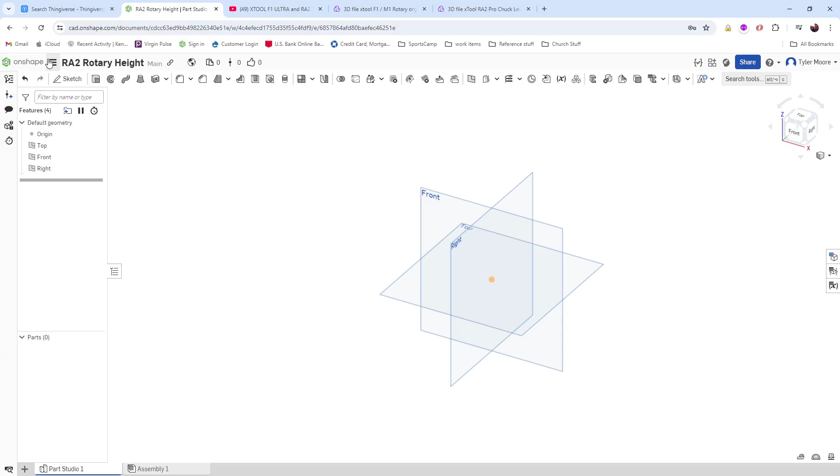I'm working in inches as well. That's another thing. So up here, I went ahead and chose inches because it'll default to millimeters, but I'm using calipers and stuff, so all my stuff's in inches. So I just go ahead and keep it in inches for now, anyway. That won't affect the exporting or anything. It just will affect how you put numbers in.

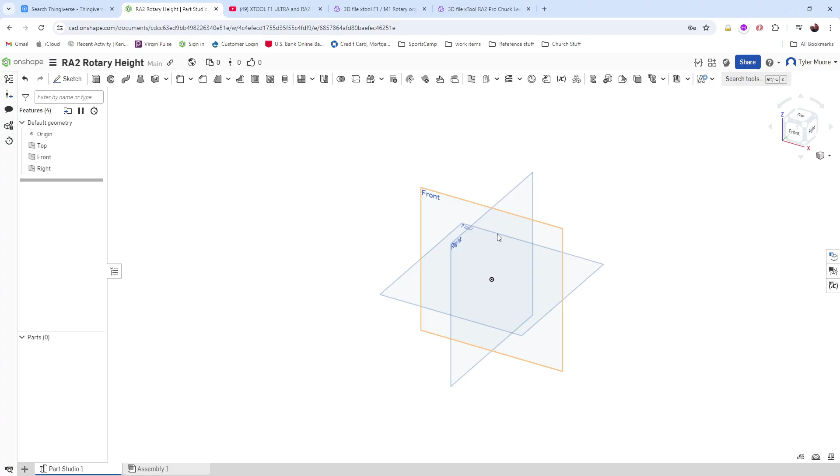So anyway, I'll start off with this. I'm going to create a sketch, and the first thing it wants me to do is choose a plane. Because I work on isometric so much, the way this part will sit in my brain anyway, I'm going to choose the right plane to work from. Obviously, this basically matters to the orientation of how it's going to export, but you can also fix that in your slicer software.

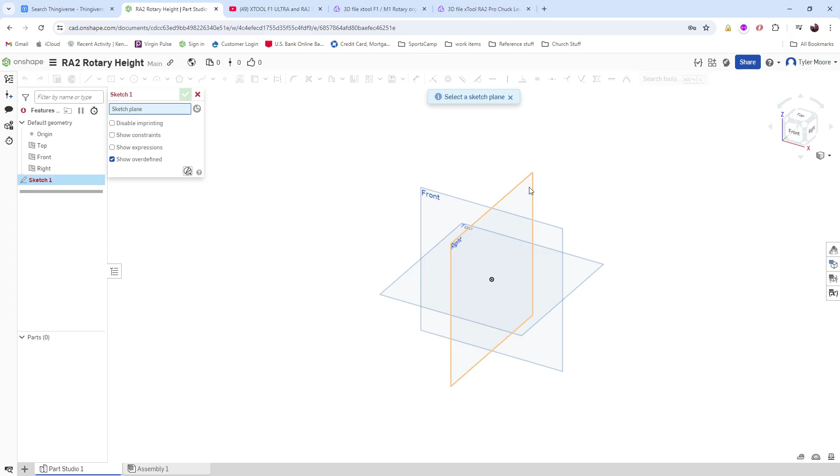So yeah, this is just because this is how my brain orients and how I was more or less trained. So I'm going to choose the right plane, and normally it'll go normal to that, but I'm just going to hit the N button, and that'll go normal to the right plane. And so I'm just going to start drawing what I more or less need, and go from there and explain to you what it is and why.

So basically, this can be the general outside shape, and I'm not going to worry about dimensions yet. I will, but not this very moment. And I know what I want is basically another cutout that's kind of off center of the top, and so I can take that and I'm going to start adding some dimensions.

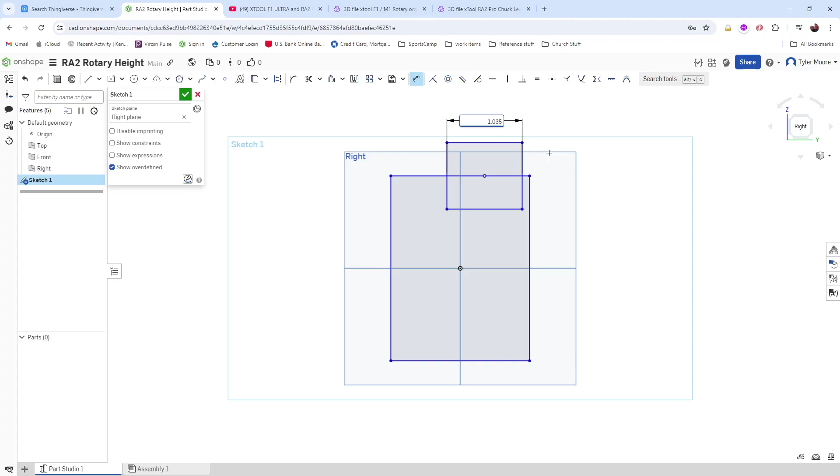And so this first box here, this is the most critical dimension for me. So I'm going to go ahead and put that one in at 1 inch 35 thousandths. And then the second critical dimension is this guy here, for my application anyway. All right, so I've got my two critical dimensions in there. And now I'm going to start filling in some of these other ones that are just design decisions. Let's go ahead and grab this top guy here. So 1.37.

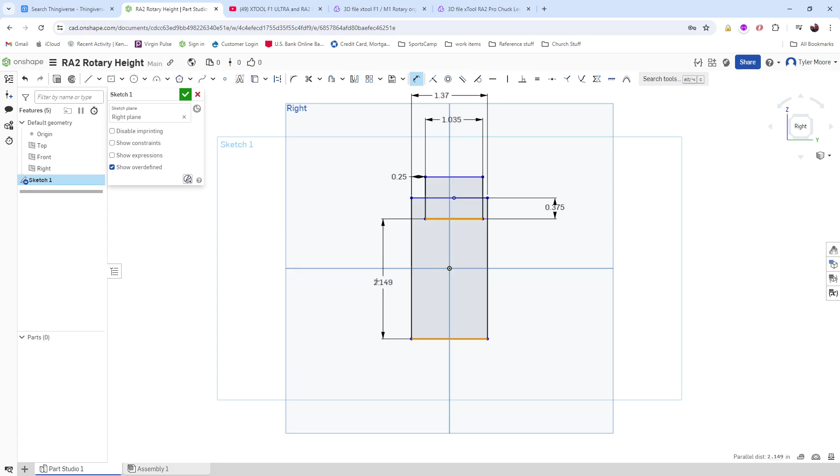And I know it's going to be a long video for you to watch, but you can flip through it however you want, and get the different parts.

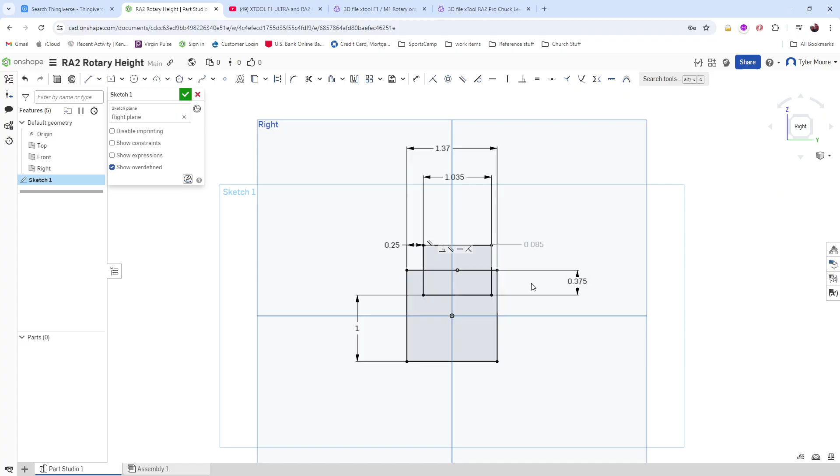But anyway, so this dimension here, whenever I click it, you're going to see all these being bold and black, and this one not. This one's grayed. So these are what they call driven dimensions. So basically, I can drive what those are, or sorry, not driven. They actually have a different term for it. Maybe it is driven. Onshape has a different verbiage for it, but anyway.

Basically, I can tell this dimension that I want it to be 1/4 of an inch, versus this one over here that's going to be the resultant of other dimensions. So I can put this one at a different dimension, and you'll see this one change, but I can't force this one to change this one, if that makes sense. So you can kind of see, well, it went really, really small.

But yeah, so the point being is that I can't double click this one and make that one change a dimension. I can only change this one over here. So just a little tidbit that you've got different types of dimensions. This tool up here, this dimension tool, is going to auto decide which one it needs.

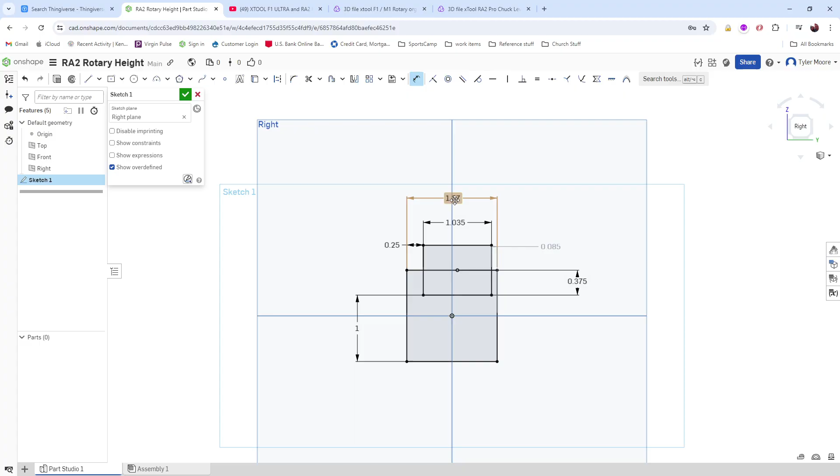Sometimes it can be smart, or it can be too intelligent or not intelligent enough. You just kind of got to know your tools a little bit and make it work for you, so to speak. But yeah, so it'll auto select those. So anyway, moving on. So this is the general shape that I want, and you may not get it yet.

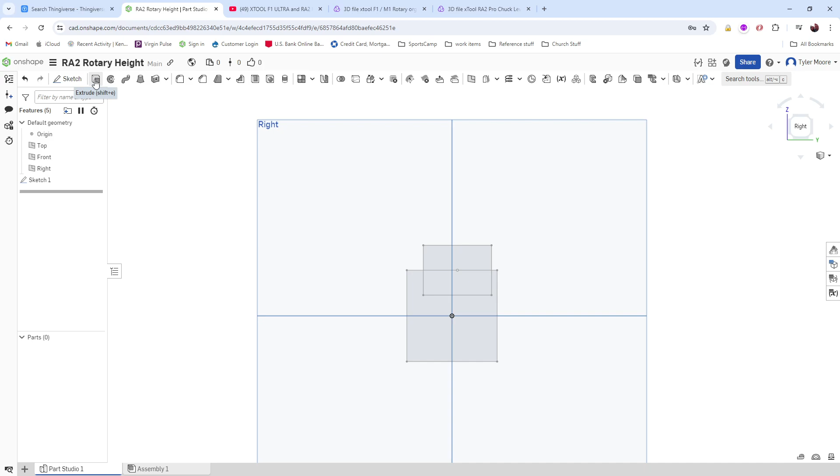But basically, what I'm going to do is I'm going to select up here, and I did that quickly. Sorry. I'm going to select extrude. If I'm inside the sketch, it looks like this. I'm going to select extrude, and then I'm going to select the faces that I want. It auto selected the whole sketch. I don't want that. I want just this face to extrude out, just this one. So I'm going to select this one, and then I'm going to hit right here.

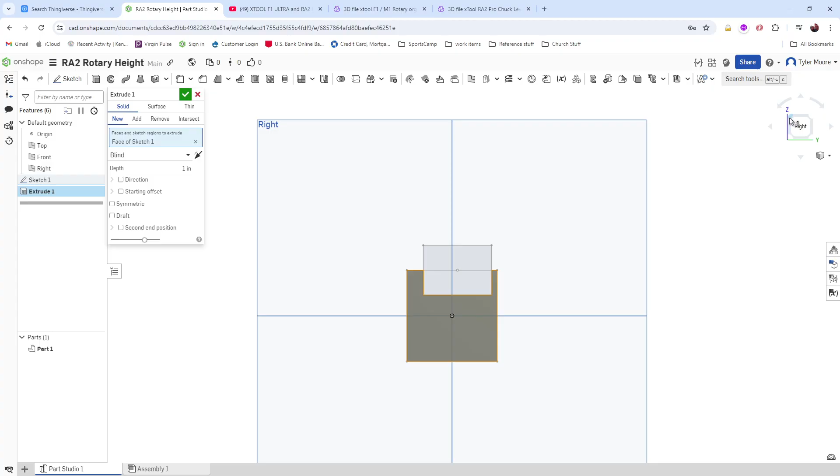You see how that one corner highlighted right there? So I'm going to select there, so that puts me back in isometric view. And so now I can see that extrusion. And so I know that I want that to be a total of, I'll just make it a total of 5.425. So it's going to be that.

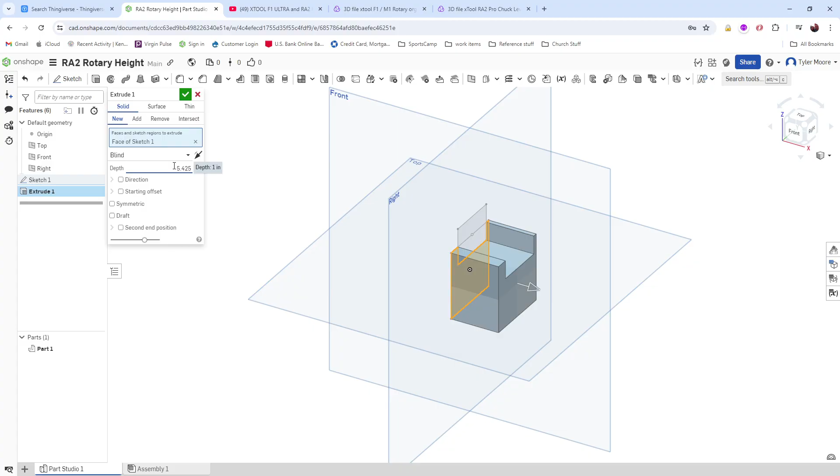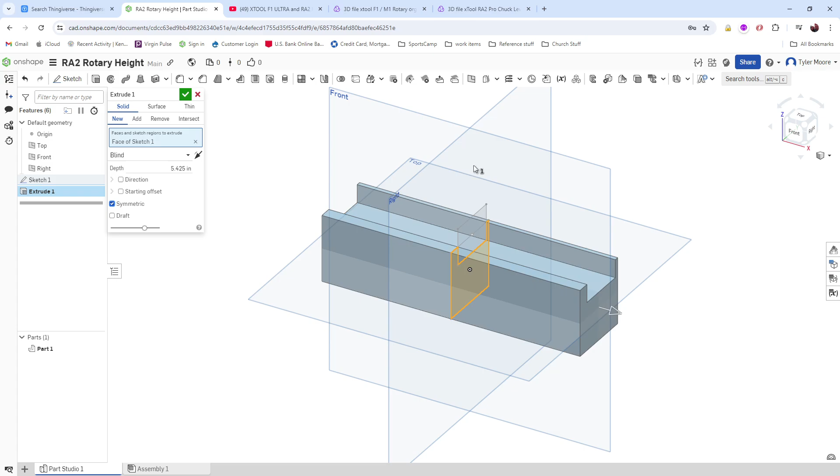Now, I prefer things to stay symmetrical inside of the world coordinate system. There's reasons for this. Maybe not right now do I have a reason, but it can be helpful to keep that symmetrical. So if you hit that symmetrical button, then it's going to basically split it on both sides of the right plane to make that dimension equal on both sides. So I'm going to go ahead and hide all these planes because now I more or less don't need them anymore. And so yeah, so we'll do that.

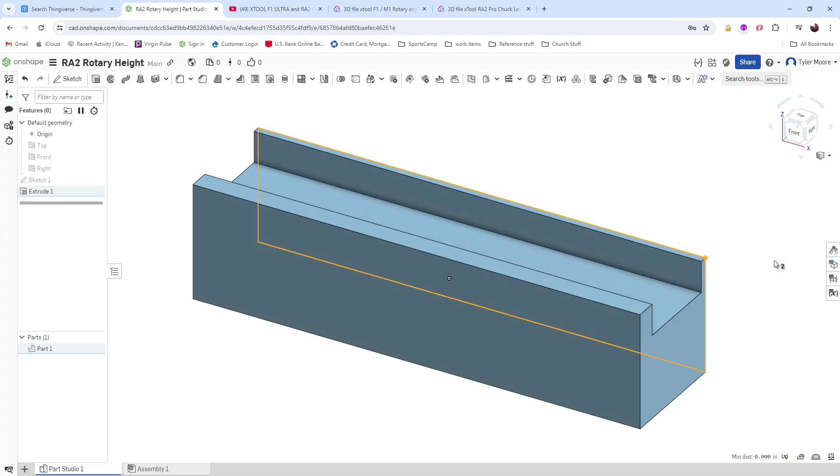So now I want to throw my holes in and make my hole pattern. So I'm gonna come in here, and so for me, the way that I dimensioned all of these holes that I'm going to be needing to put in, it's going to be coming from this corner back here. So I'm just going to go ahead and flip over and basically orient to this face, and I'm going to do that by hitting the N button. That's going to bring that face to the front.

And so from here, I'll just select new sketch. And the first thing I'm going to do is I'm just going to grab that circle tool, and I don't care where they fall at this very moment, because I'm gonna make them go where I want. And so I'm gonna then just hit escape to get out of that tool.

I'm gonna grab the line tool, and just because this software will auto put some stuff in there for you, what they call relationships. So it'll auto put relationships in there even when you don't want them to. So I always come down and just kind of go off center to where I actually want it, because I don't want it to accidentally grab a relationship. I want it to be coincident here. See how that's stuck there? That's showing me that it's basically coincident to that line.

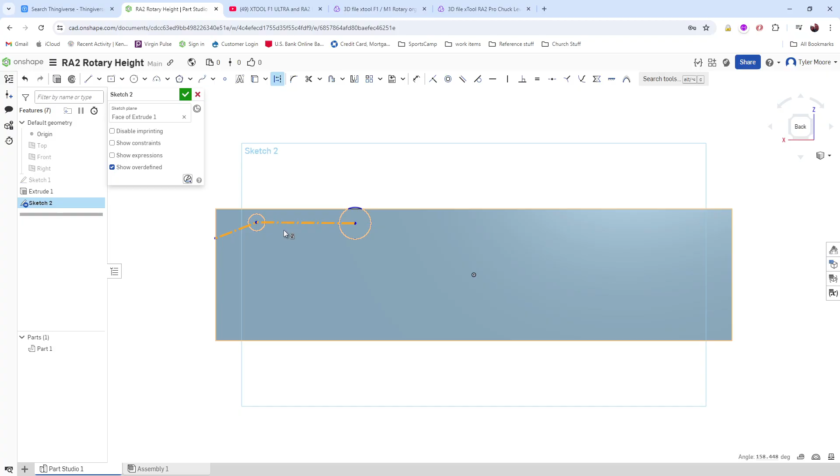So I'm going to drag it up to here, and then I'm going to grab that center point there and drag it to there. Okay, so now I've got all of these lines ending in a coincident relationship. This guy up here. But now I want to basically use these as what they call in drafting construction lines. So if I select those lines and hit construction, now those lines are basically just for my benefit, not necessarily going to affect the drawing, so to speak.

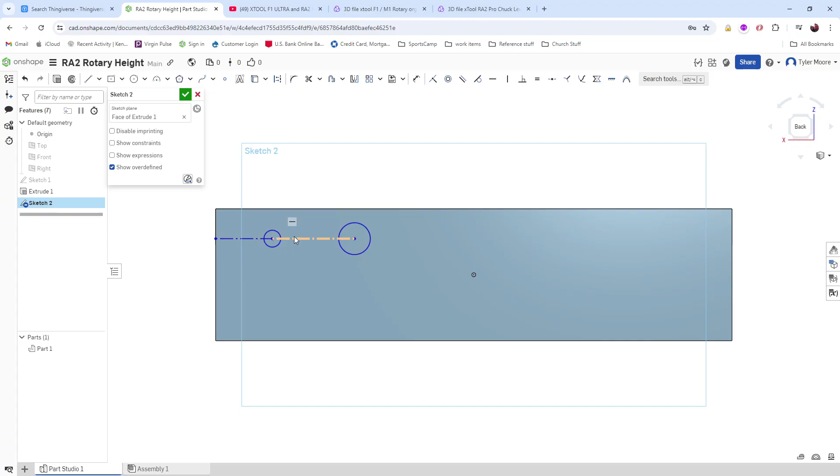And so I'm going to put those lines in, and then I'm going to select horizontal, and that's going to basically make a horizontal relationship for all of these. So these lines now have no other thing in life but to be horizontal to this axis here. So that way I now know that these circles' center points are exactly centered to each other, because now they're on a horizontal line. It's important.

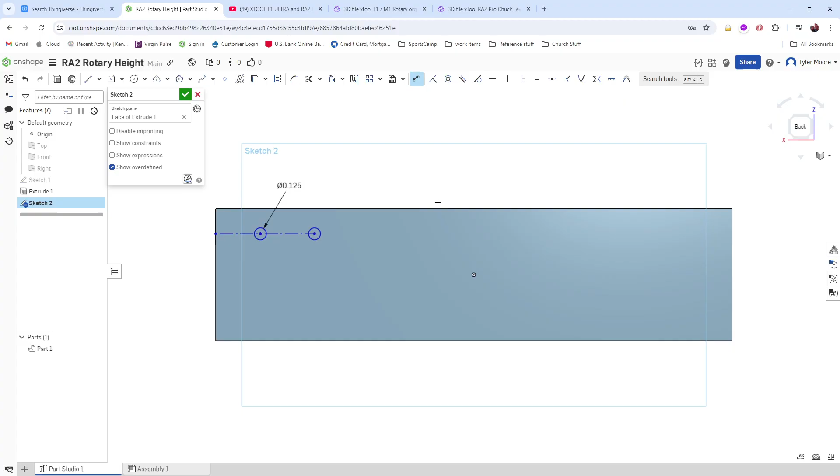So now I'm going to take and grab those guys, and hit the equal button, and now they're dimensionally equal as well. I'm going to grab that guy and put a dimension on one of them. I don't have to do both now because I made them equal. I'm going to go 1, 2, 5 - that's the dimension I need. So now I have these holes dimensioned to the diameter that I want.

Then I can come in and throw in a dimension here. Let's see here. For my numbers, some of these dimensions I already had written out. I need to double check this one real quick. I think I want to do 765, but I'll double check it. No, I need it to be, let's see, 0.735 plus 0.0625. Okay, so I need that to be 0.7975. Alright, double check that with the calipers real quick before I call that good. 79. Yeah, that's correct.

And then let's see here. Then my between-centers for these two, I'm gonna put in, and that's 2.165. Okay, so I've got those guys. That's solid. So that's gonna be that.

But then you may be thinking, well, you still have to - well, actually, let me say it this way. You'll notice that they're blue. These are blue lines, the circles are blue, the construction lines are blue. Well, that's because I've dimensioned them, or constrained these in most directions, except for this direction.

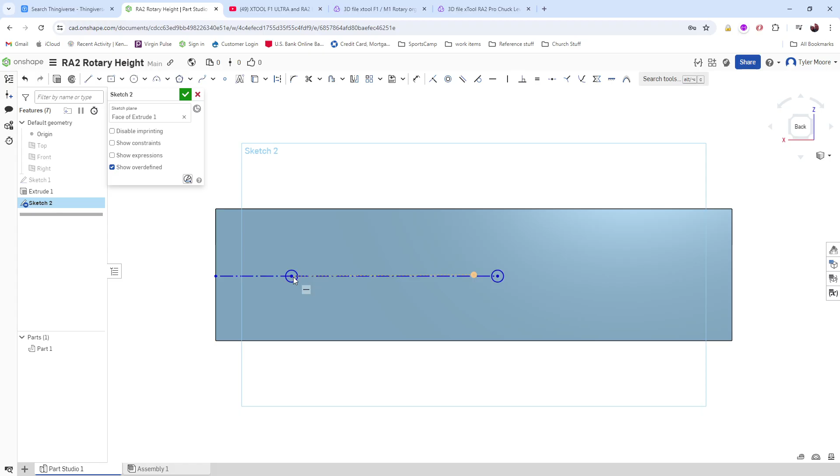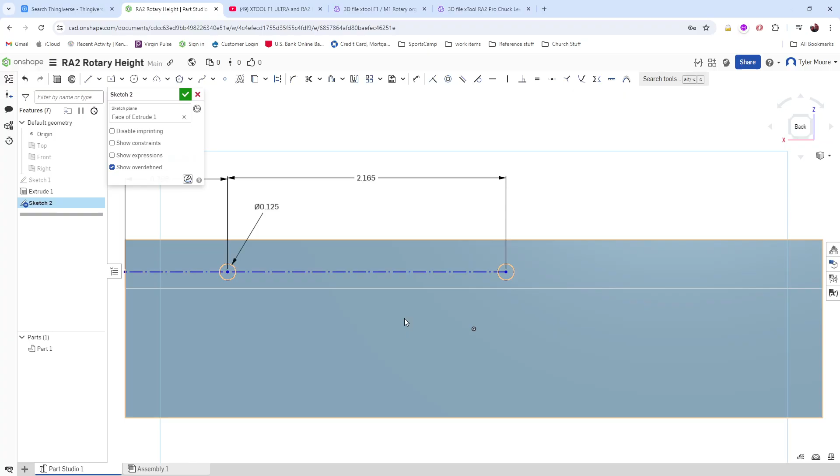I need to know where they fall this way, and so how I can do that, I can come in here and do a make hidden edges visible. So now what that's going to show me is this line, or sorry, this cutout here. Well, I definitely need it to fall above that cutout because that's the whole point of it. So if I come back, I should be able to grab that line there, and this line.

Okay, this is a great example of the intelligence - it's an auto intelligence, there's intelligence built into this dimension tool. And so you see how it's kind of going above, and it's getting that 254. Well, it's going above my center line. Sometimes when people use a center line, it's because they want to use it in a radius or a diameter, maybe doing a sweep of a circle. So what it's assuming is, hey, you've used a center line here, there's a possibility that you're trying to sweep a circle. So instead of putting in a radius dimension, you can just put in your diameter dimension, and it's a lot easier for you, which is true.

But I don't need that right now. I need just that one dimension like this. If I just come down and drag it, I'm not dragging anything, I'm just bringing it down here. It auto corrects. So anyway, that's a fun little tidbit there.

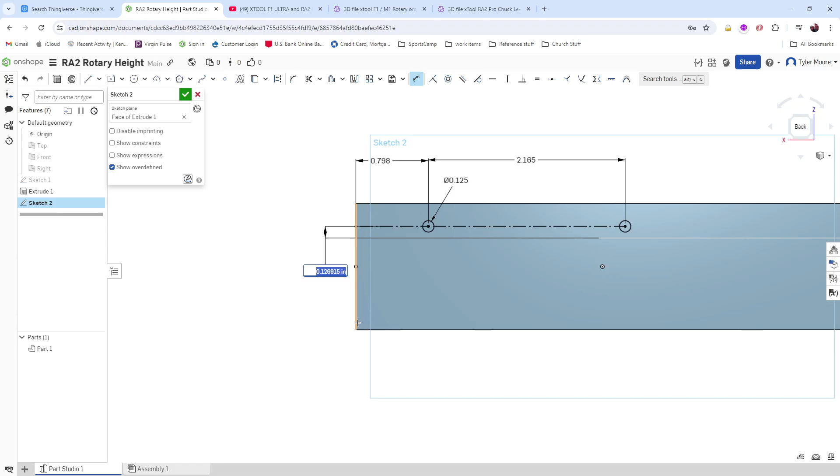Let me figure out my dimension here real quick. Looks like I got a little foot here that I got to be careful of. So that's 33 thousandths. You can't see my calculator, but it's okay. And that is 87 thousandths. Plus 0.033, plus 0.087. And then I need to then take half the diameter, so plus 0.0625.

So 180, 182, so 182. Sorry, I know this makes the video longer, but I'm trying to draw something for real here and not just do a little demo. It's two birds, one stone. That should be good, alright. So 182 thousandths is what I need that to be right there. So 0.18, or 182. Right, so that's going to be dimensionally accurate, dimensionally what I need.

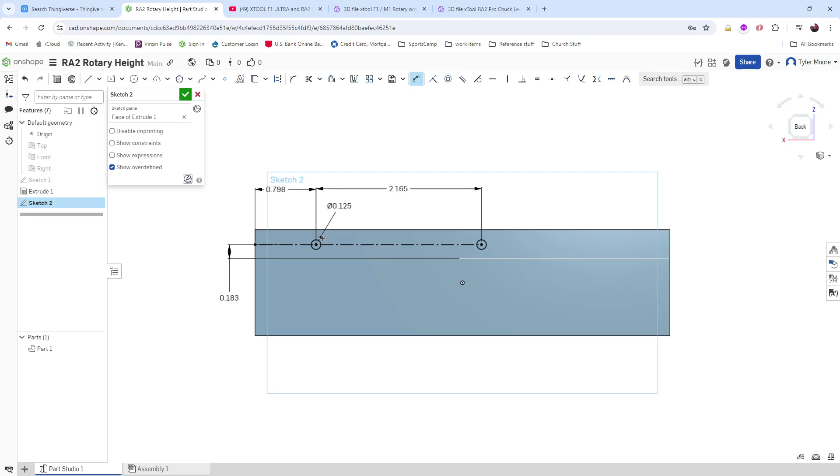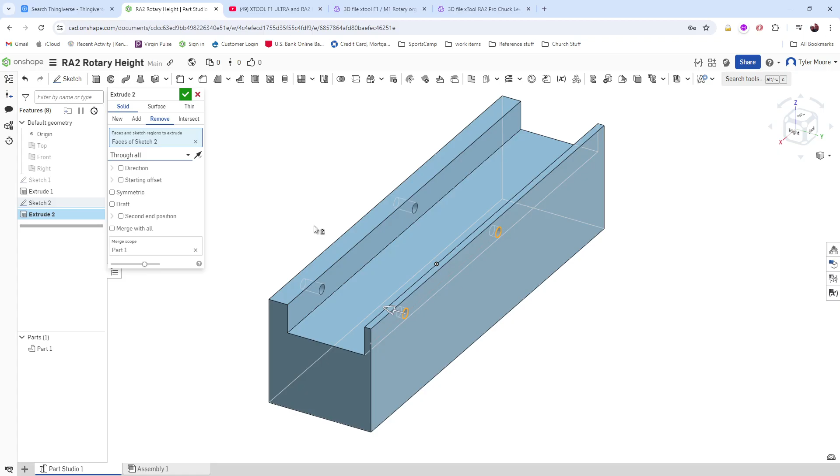So now you can see I've got those lines turn black. And so then I can come in here and hit extrude again. But this time, it's going to auto do an extrude out, but I want to do remove. And then that's currently set to blind, which means it's going to go a specific distance. And so now what I'll do is I'll just hit through all. That's going to basically put it through all the faces of that part.

So there you go. And you see I've got those hidden lines still selected. I'm just going to put those back to removed. Alright, cool.

So that's a step in the right direction here for us. And then...

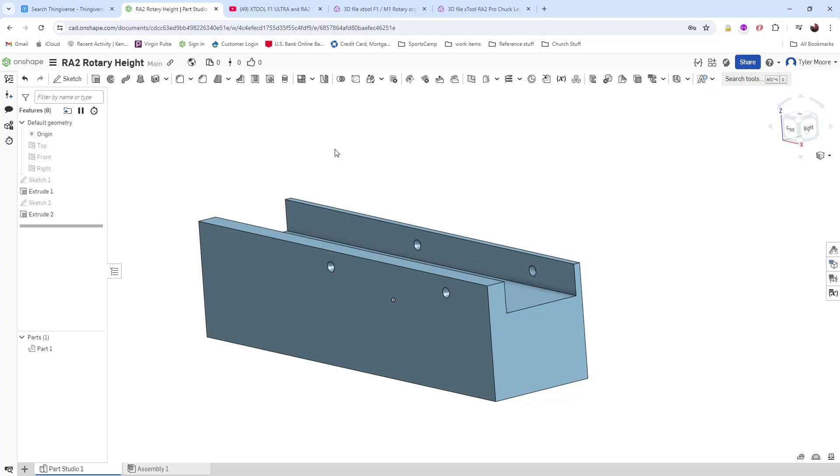Something I'm going to go ahead and do now before I forget about it: I'm going to look at this face and create an extrude cut. I need this to not be a channel all the way down because my part doesn't channel all the way down. I need to have a cut out there. So I'm going to come in here and grab this guy right quick.

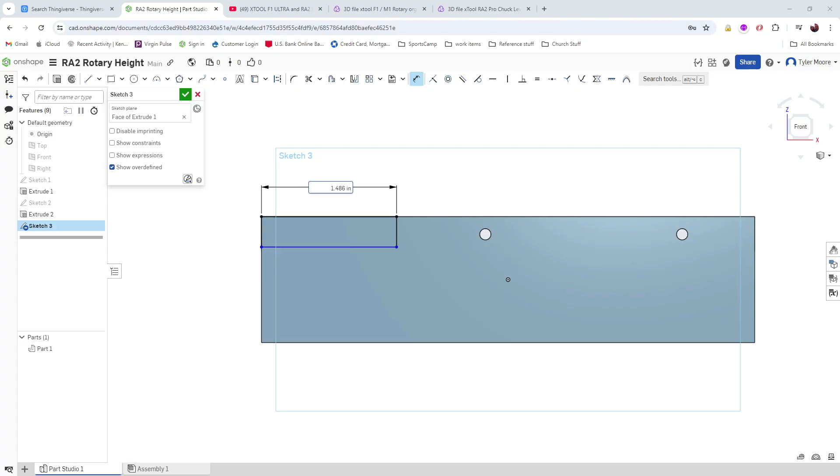Into a dimension. And then that dimension was 5.425 minus 3.75, so that should be 1.675. And then I can actually do the hidden line trick again.

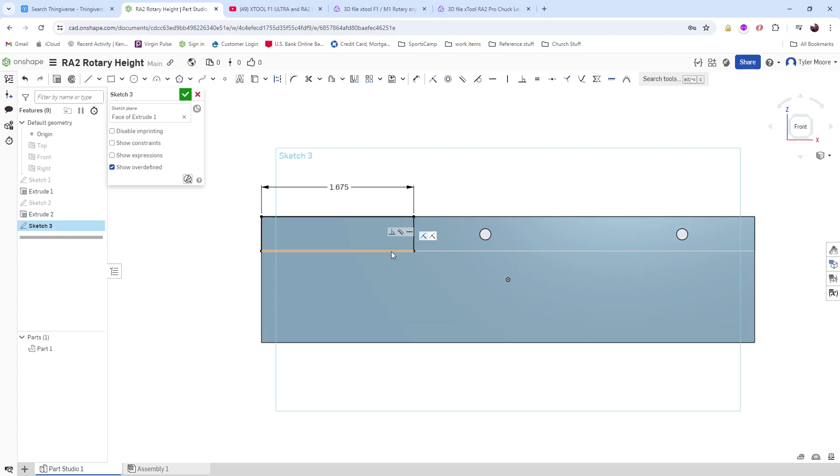I may have done that too early. Just to keep everything relationally together, I could throw a dimension on there since I know that dimension, but just to keep things relationally together so I don't have to fix something later on, I can just basically add that coincidence. Now that new line I'm putting in this cutout will always be tagged to that cutout line that's already there. So if I ever need to adjust this profile, it will automatically adjust, so I don't have to do it in the future. Little tips and tricks sort of thing there.

So I'm going to do another remove through all. Good to go. Alright, so that's the basic outline of what I'm trying to make. Let's see.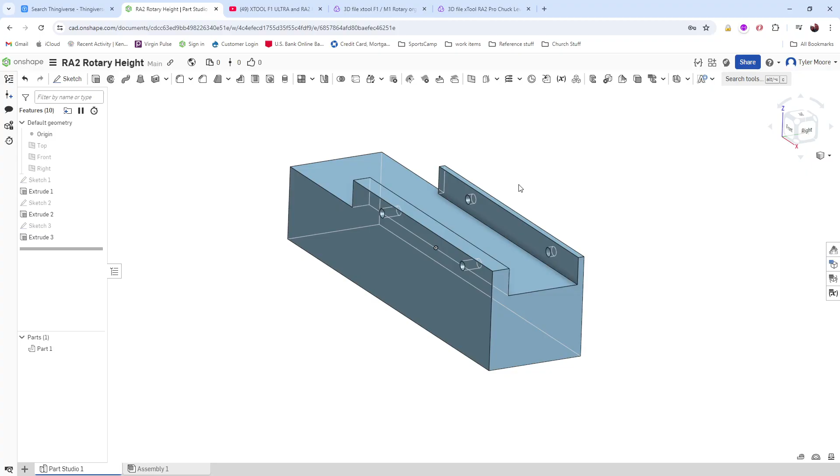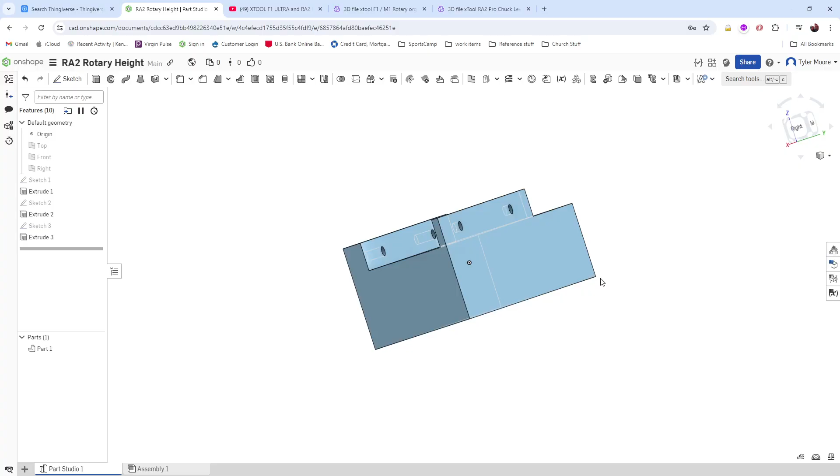I have not yet done a good... I did not grab the dimensions for these bottom holes that I need to put in, so I won't waste the video time doing that.

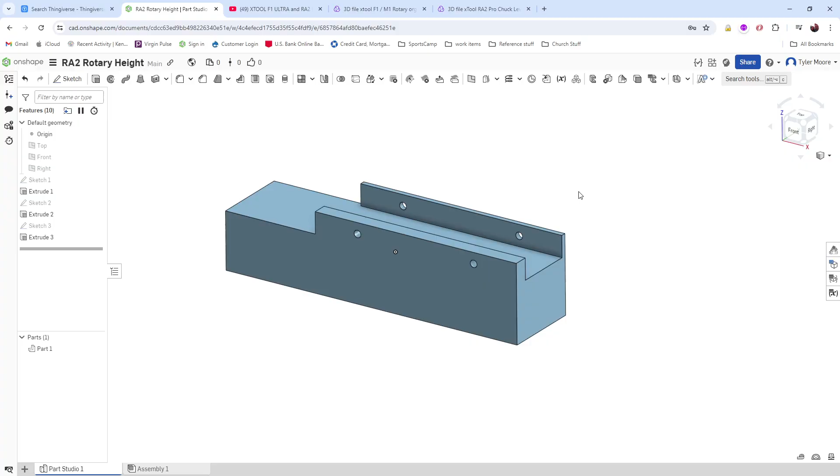But what I will do is just show you how it looks to export real quick, in the sense that maybe I want to go ahead and 3D print, maybe my design's already done, which it's not, but if it was, things I like to do is throw little radiuses on or little fillets here.

Cleans the design up a little bit. And sharp edges sometimes aren't fun, just in general. So we can put a 0.0625 here. It kind of takes all the sharp edges off.

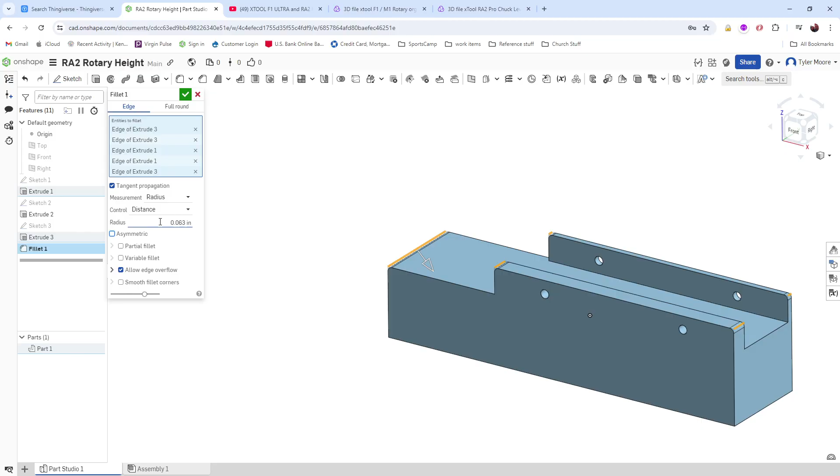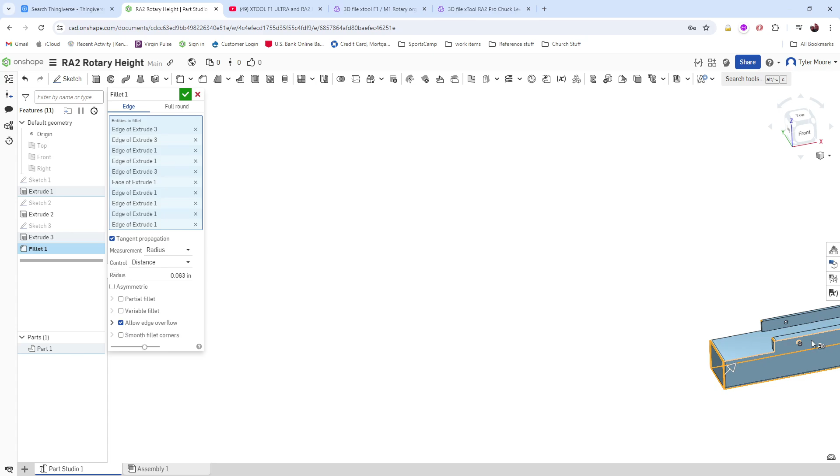Another thing, I always throw them on the bottom too. Helps with, at least in my printer, elephant footing. It's critical in this part that I have straight edges, so that elephant foot can happen, and you get that's not good, or at least in this part specifically. So these little radiuses basically help with controlling that just a little bit.

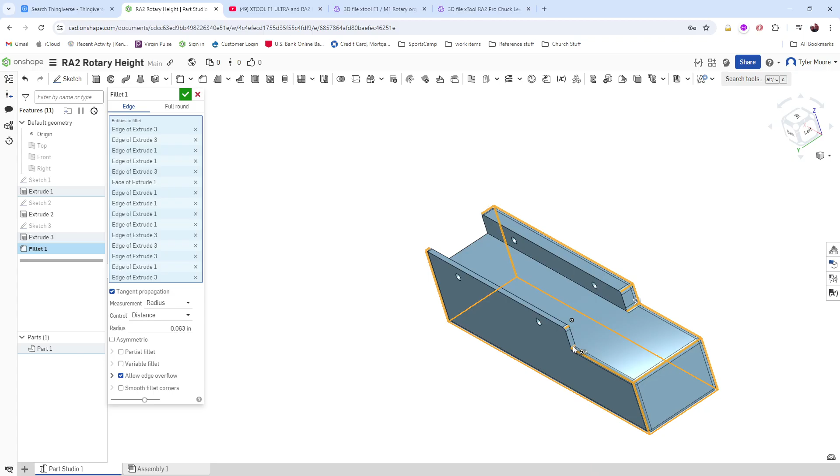I can't put that there. I don't want that there. I'll put it there, it's fine. I think it'll be fine. I know I need to keep that straight walled for my printing purposes, or for the part to fit in there correctly. It doesn't have a radius, so I want that to be straight.

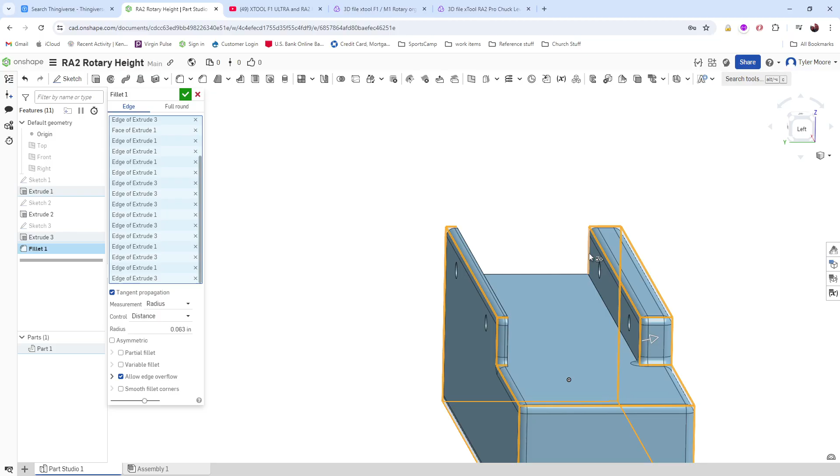I can do that. It doesn't like that, it's not thick enough. Okay, I get it. I don't want it there either. Okay.

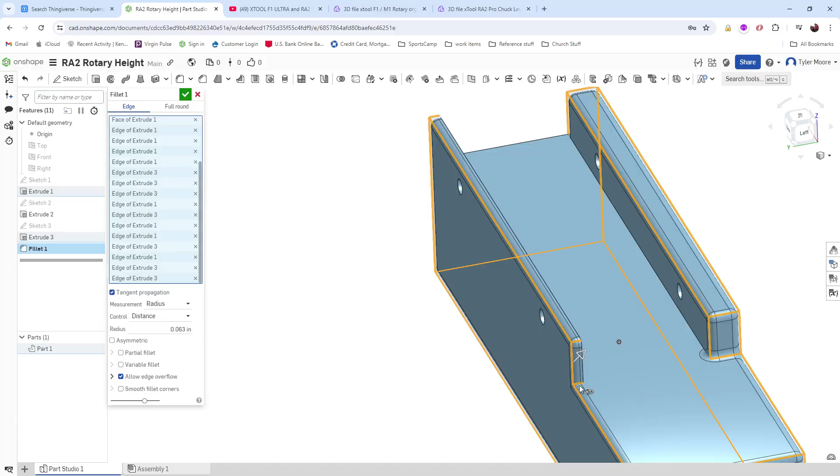So we got that good. Alright, so that's good. A good radius part kind of looks a little bit cleaner now, a little bit more of a finished design rather than the blocky shape. It really helps make the design better as a whole because you're not as sharp on your edges, and it'll feel better in your hand, sort of thing.

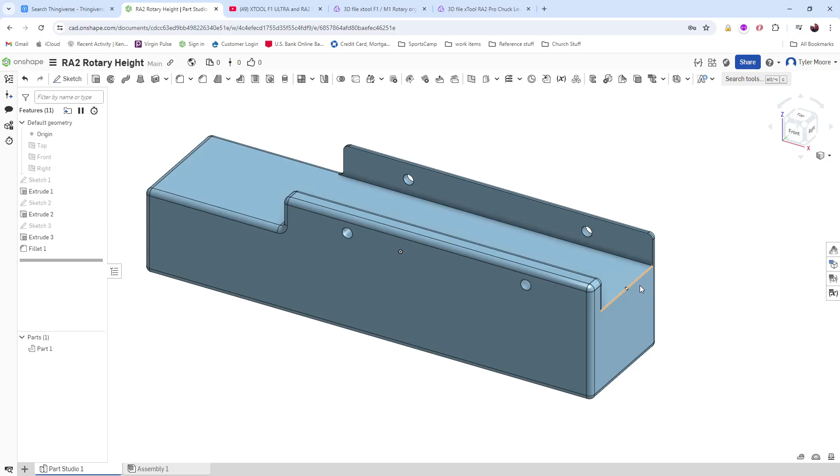I could have thrown one there too, let me go ahead and do that real quick. I can just add a quick one there, it'll add that to it. It created another fillet, but well, let's be purist here.

Cool, alright, cool. So that's the basic level of my design where I currently am at. So yeah, like I said, I'll show you how to export it.

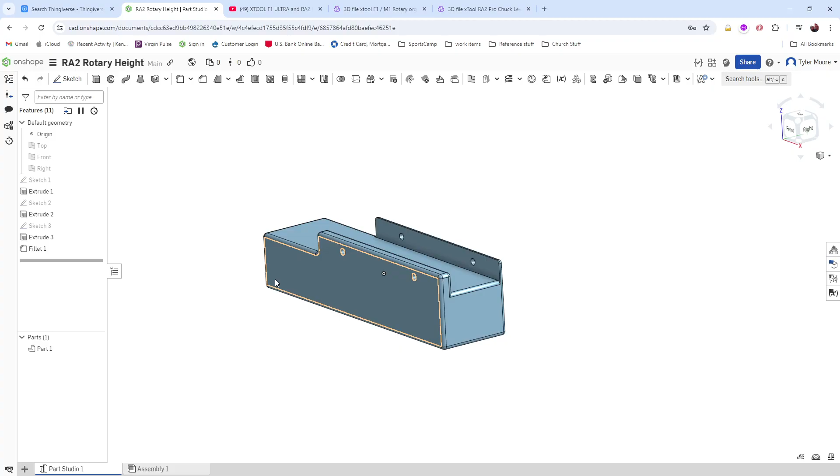So there's two ways to export. Well, there's a lot of ways to export actually, but right now I only have this one part in this. So my assembly, I'm done. I don't have an assembly. I could throw this in the assembly.

You can do a lot of fun things. I can insert the part, and make a whole assembly with this. And if I had the other components drawn up that I'm working with, I could bring them in here, and test fit everything and so on and so forth. But I don't need to worry about that right now.

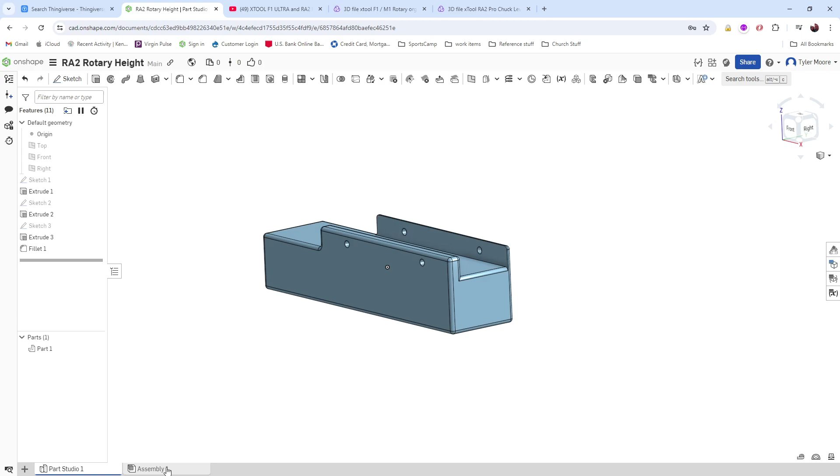What I want is just this part. So I can rename this part here, which is actually not a bad thing to do. I'm going to call this the rotary riser. And if I call it the rotary riser, it'll actually rename it in my assembly too, which is kind of a fun thing.

But let's say I had multiple parts—you can draw multiple parts inside of a part studio. You could end up with multiple parts coming down here associated with this one specific thing. That's why they have this area here.

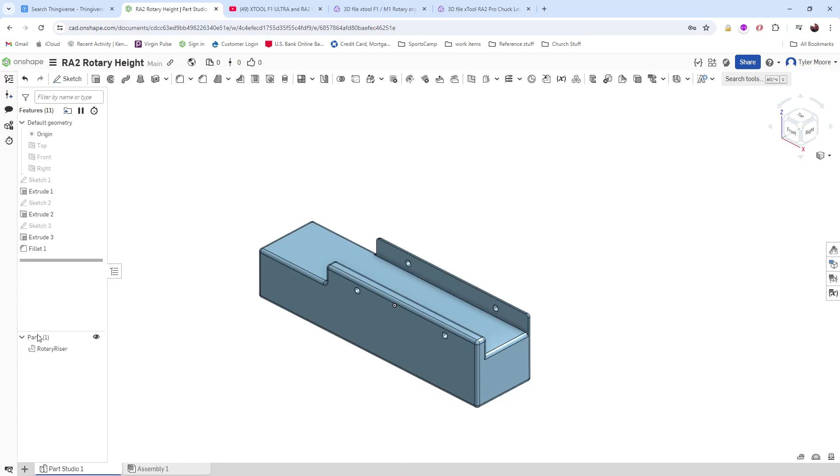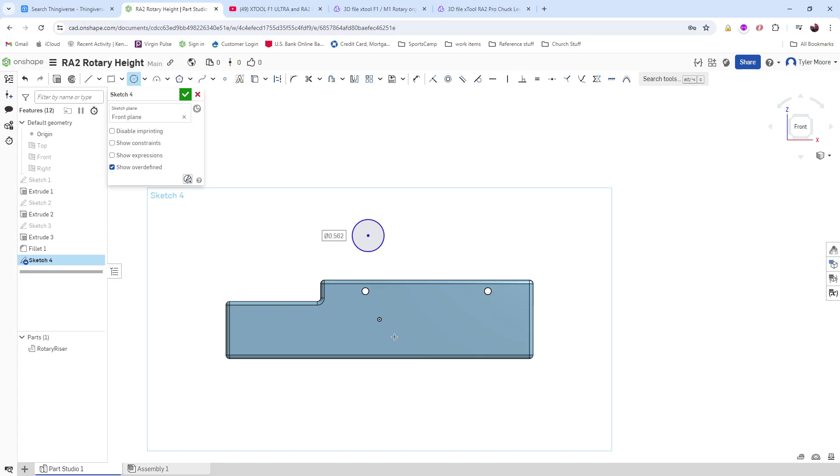I don't have a great example off the top of my head, but if I selected this plane and drew a cylinder without attaching it to the first part I drew, and then created an extrude of that, you'll see that creates a whole other part.

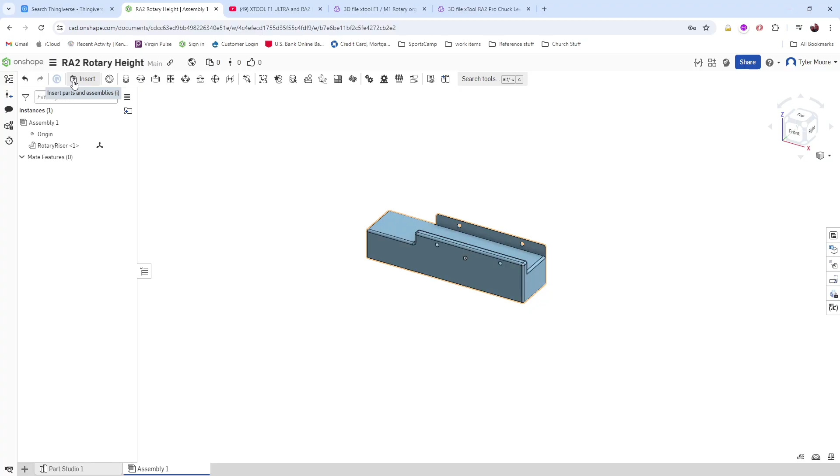Now, in my assembly, I only have that one part because of how I inserted it—I selected just the rotary riser. But if I selected Part Studio instead, see how it brought both of those parts in.

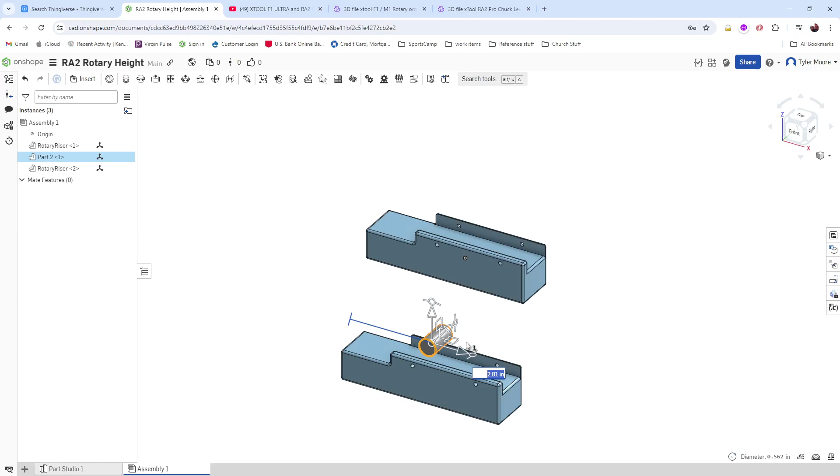Now I don't think— oh look, I can modify that. Let's do this, this is somewhat of a learning experience here. Does that move it over here? Huh, no it doesn't. I guess it's just dealer's choice on how you want to draw stuff. I don't know why specifically you'd do some of these things—they just give you some options, I guess.

But anyway, all that to say is that when you create a whole other body, it's going to show up as a separate part here.

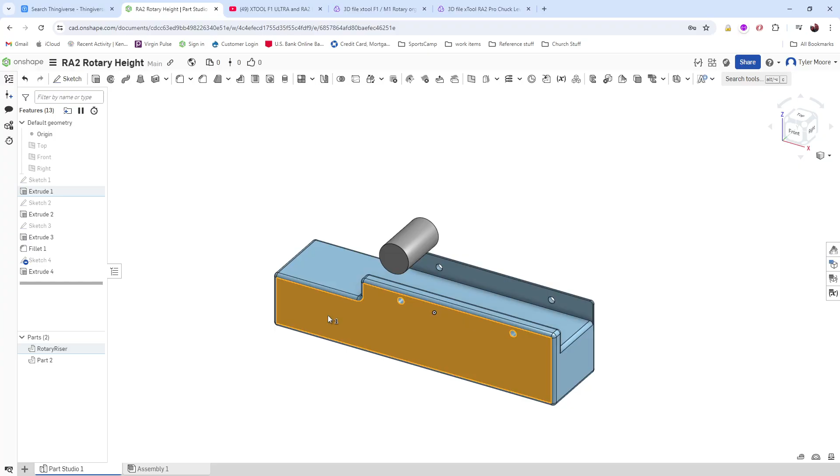Whereas if I come in here and do the same thing, but create a sketch straight off that face, you can see that's merging with the scope of my rotary riser.

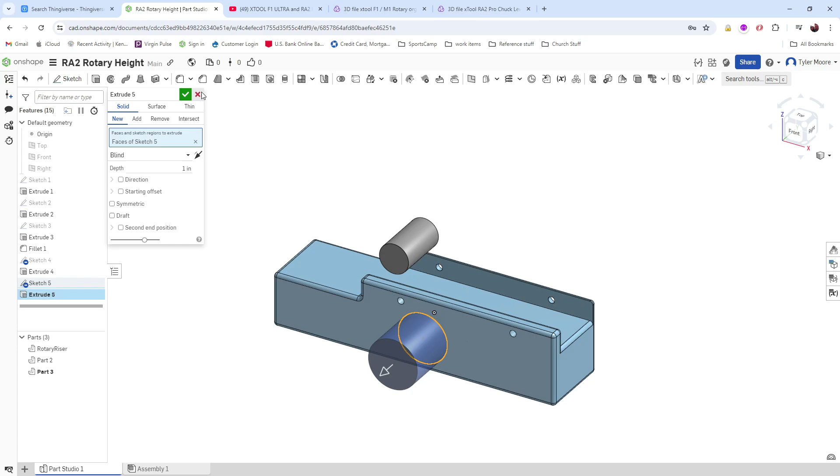If I don't want that—if I want it to just be a whole other part for whatever reason—I can hit new, and that's going to create a part 3. Once again, there's no good reason I have for doing it, I'm just saying there are options out there.

Okay, back to exporting. Export—I'm going to come in here. If this was me doing this at home, which I will be once I get other dimensions worked out and get this completely done, here's what I'll do.

I'm just going to hit export and select—I know I want it in millimeters. I want it to stay in fine resolution, because that's going to break that model down pretty well. If I used any other resolution, it could affect print quality, since this basically gives the best opportunity for your slicer to cut that model the way you want.

It's going to put a name on it—it'll say Part One or Part Studio One because of what this is called. We could have called this riser, and then it would have said riser, rotary riser. That's just where it's drawn from.

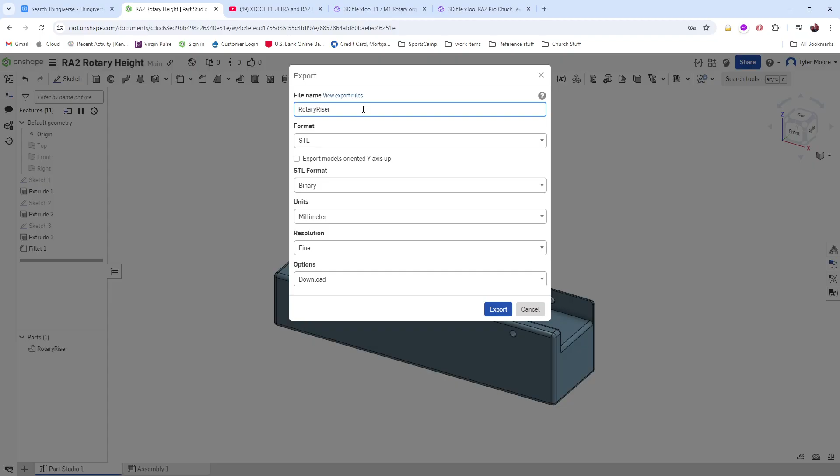So I'm just going to export that, and you can see I've got the STL up here. For me, I could throw that— I use my Bambu printer, so I'm going to put that in there.

And then I could select the color, which I actually don't have black anymore, but I need to update that. Then I could slice it, and bippity boppity, got it.

Oh, you can't see any of this because—my bad, that's just the way I'm sharing the recording. Anyway.

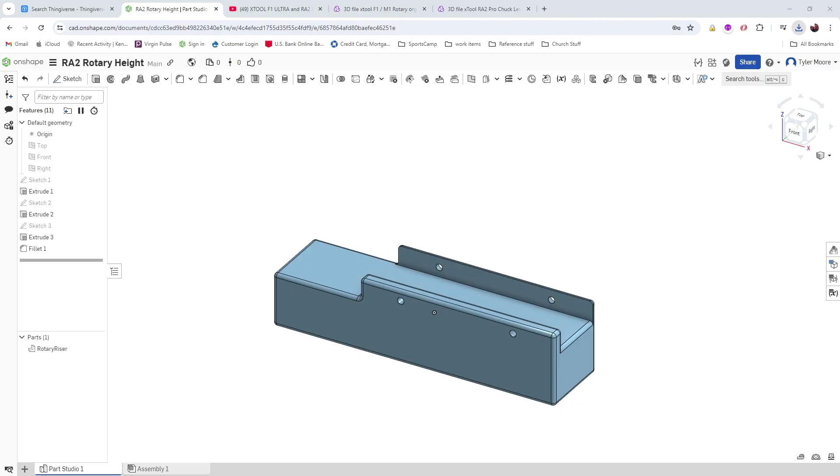So that's just some basic ways of making stuff in Onshape. Hope it helps.